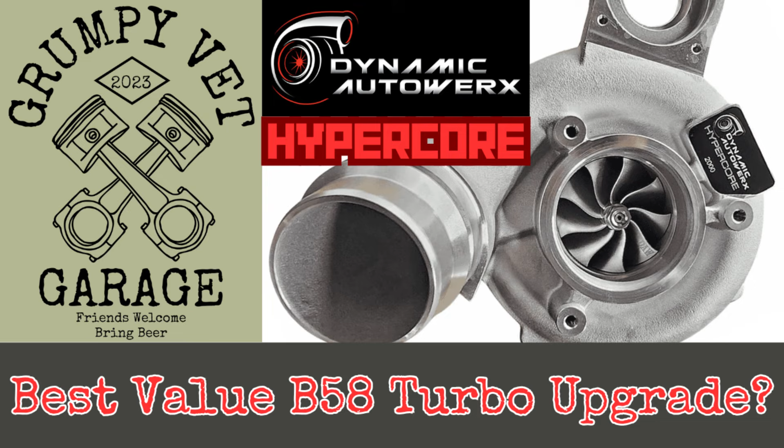On the channel, I've been going over stock location turbo upgrades for the Gen 2 B58. The videos have received a positive response from viewers like yourself, but also generated questions about the Dynamic Autowerx Hypercore and how it performs as a B58 turbo upgrade.

So today, I'm going to go over the Dynamic Autowerx Hypercore. First, we need to look at what the Hypercore is. It is a drop-in turbo upgrade for Gen 1 and Gen 2 B58s.

Dynamic Autowerx characterize it as an ultimate OEM replacement core for those looking to maximize performance without sacrificing drivability. They list this upgrade as a core because it doesn't completely replace your turbocharger.

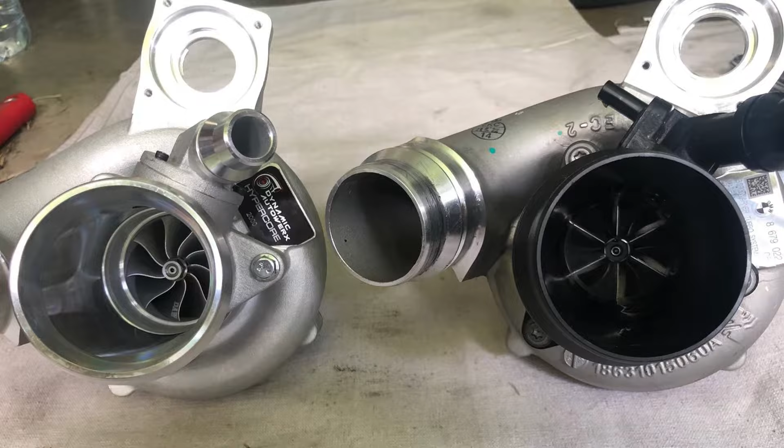It's a new center section and new compressor side of a turbo, but still utilizes the factory exhaust manifold / turbine housing. They promote that the core is easy to install and it utilizes your factory V-band clamp that holds the center section and compressor side of your factory turbo in.

You reuse that clamp, but then you still need to move over oil and coolant lines and of course change seals to complete the installation.

The Hypercore has a forged billet compressor wheel and also uses a Garrett GTX style turbine wheel. Dynamic Autowerx says that the Hypercore is designed, machined, VSR balanced - which is vibration sorting rig balanced - and assembled in the United States. This is great for quality control, but this is also the same process for all other Dynamic Autowerx new construction turbos.

For size comparison, the OEM turbocharger has a compressor inducer of 50 millimeters and is a 6-blade compressor wheel, and then has a turbine exducer of 50 millimeters and is a 10-blade turbine wheel.

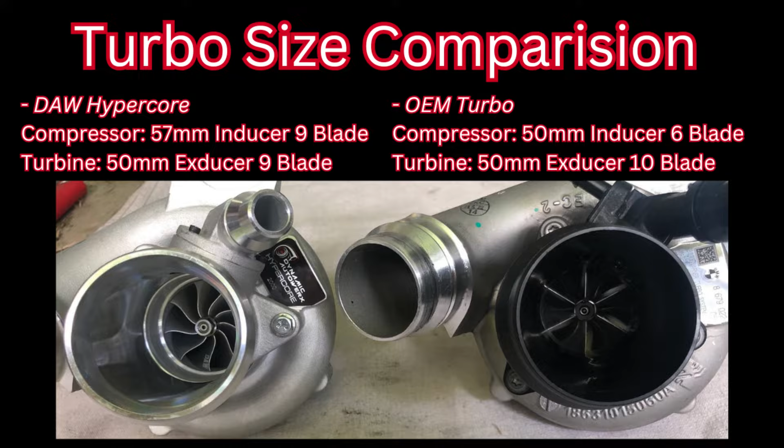The Hypercore from Dynamic Autowerx is 7 millimeters larger in the compressor inducer, so a 7 millimeter larger compressor wheel that is a 9-blade compressor wheel compared to the 6 blades of the OEM.

And then the turbine exducer is 50 millimeters, just like the OEM turbocharger, but it is a 9-blade wheel compared to the factory 10-blade. Dynamic Autowerx markets that this core is capable of offering 12 to 14% more power capability over the stock turbo while maintaining fast spool and excellent throttle response.

Osprey Performance in the United Kingdom is one of the shops that has the most experience with the Hypercore, and they have a lot of high praise for it.

They claim to have made 619 wheel horsepower using the Hypercore. They didn't provide any build sheets of how the configuration of the car was when it made that number, or even what fuel was being used. I'm assuming it's some sort of race fuel or ethanol, but because they really didn't give a lot of information other than the 619 wheel horsepower number, I somewhat take the information with a grain of salt.

Additionally, they talk about using a stock turbo Gen 1 B58 that they had tuned and made 450 wheel horsepower, and then, without changing the tune, swapped in a Hypercore and was able to then make 494 horsepower.

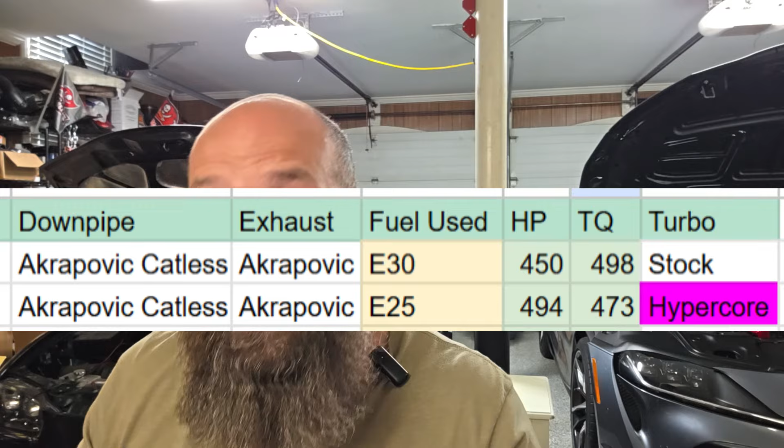So as you can see, the whole setup of the car is the same. The only difference is the Hypercore, with a little bit of difference in the ethanol, but I don't think it's a drastic amount of difference. Before the Hypercore was installed, they were making 450 wheel horsepower, which on stock turbo is pretty good. But after, they made 494 wheel horsepower.

So clear results of a 44 wheel horsepower increase, roughly a 10% increase in horsepower by installing the Hypercore. Seeing the marketing from Dynamic Autowerx and from Osprey Performance, they're claiming like 12 to 15% horsepower increase by installing the Hypercore.

I figure the best way to approach the lack of documented dyno data is to look at what stock turbo performance would be, and then we can try to estimate what benefit you would get from installing a Hypercore upgrade. So here is all the data I was able to find.

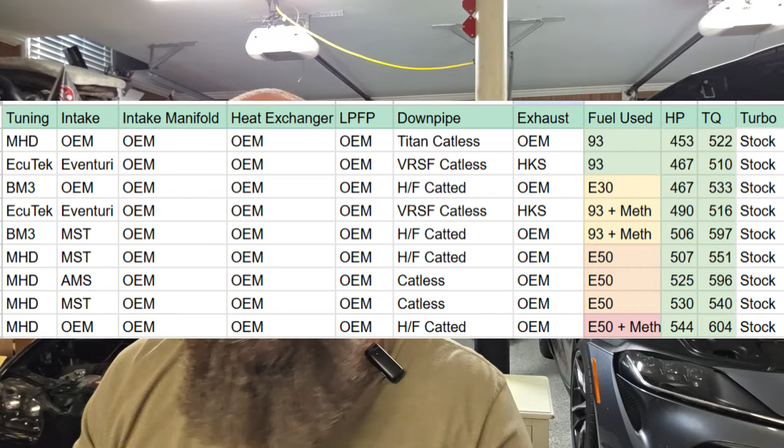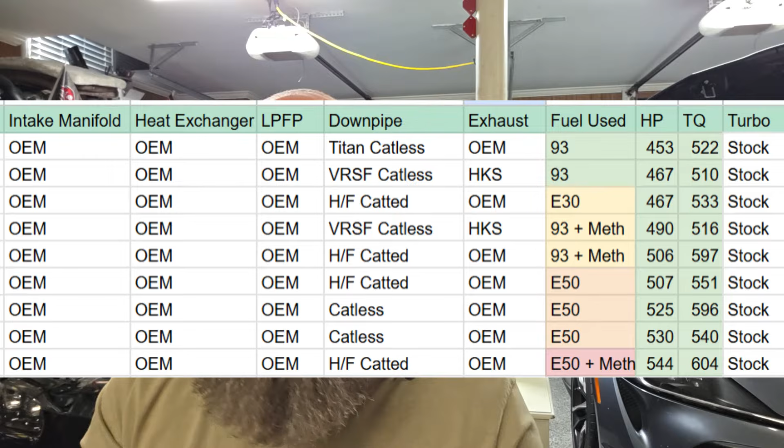Stock turbo Gen 2 B58s, some using 93 octane pump gas, some using 93 with meth, also some E-blends, some conservative ones around E30, and then slightly more aggressive E50, and then E50 with meth injection.

Looking at the data, we can see stock turbo performance, 93 octane on the bottom end, making 453 horsepower, which for a stock turbo is still really good. And then E50 with meth injection making 544 horsepower, which again on a stock turbo is pretty impressive numbers.

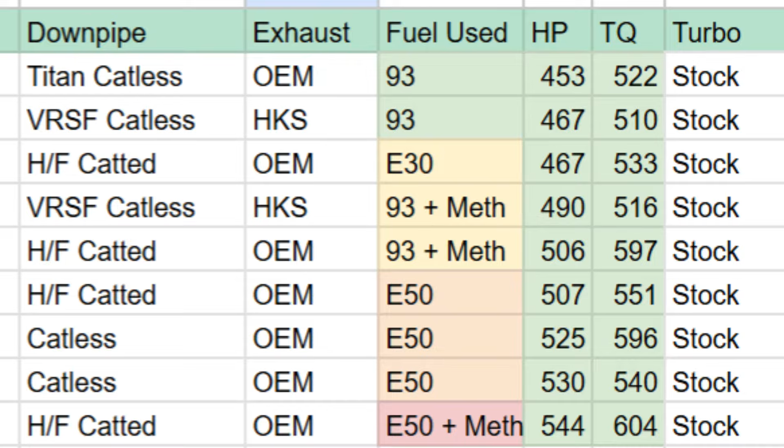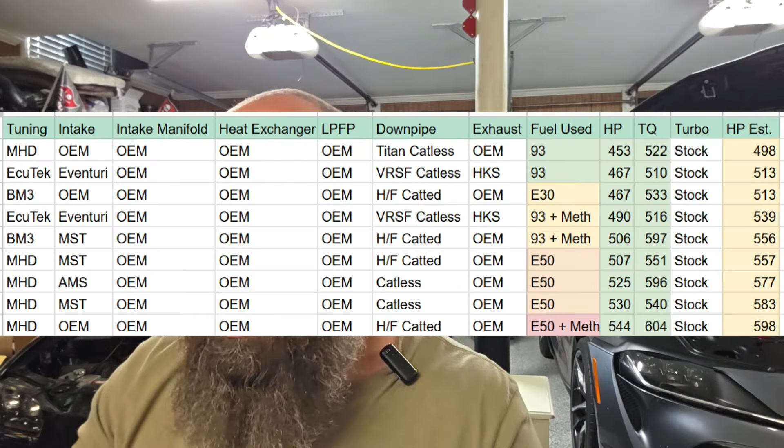So trying to keep the power estimates a little more realistic, I've decided to go with a 10% increase. I still think that could be a little optimistic, but with a 10% increase in power, that 93 octane, 453 horsepower output would then turn into 498 horsepower.

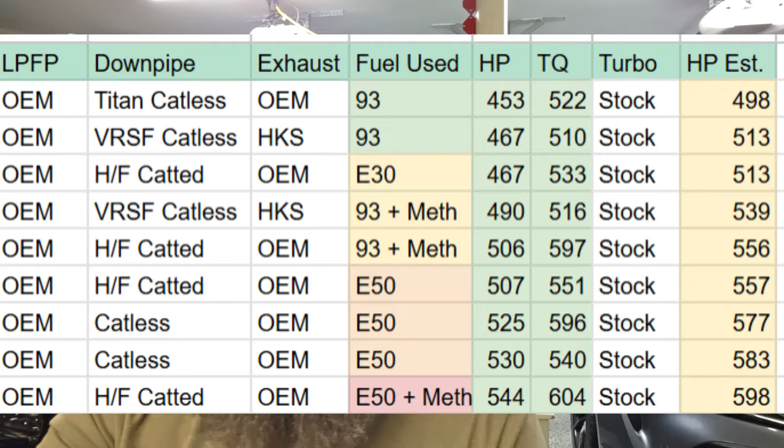And then the E50 with meth injection that was 544 horsepower, with a 10% power increase, we're talking 598 horsepower, which is pretty impressive. Additionally, to put this in perspective, the Hypercore being able to make on E50, let's say 550 to 598 horsepower, is roughly equivalent to the performance you could expect by installing a Pure 800 and running 93 octane pump gas.

So ultimately, my opinion of the Hypercore is positive. I think it's for people that are wanting to maintain stock transmission, stock fuel system, and then on 93 octane, probably trying to make somewhere between 480 to 500 horsepower, and then on E30, trying to make somewhere around 520 to 540 wheel horsepower. And I think that really wouldn't even be pushing the setup.

I think with more aggressive tuning, a more aggressive setup, more supporting mods, it's possible that the Hypercore could support over 600 horsepower, but I think that would be the limit. So the 619 wheel horsepower talked about by Osprey Performance, I think is possible, but right there at that knife edge limit of what the Hypercore is capable of doing.

Another thing I think the Hypercore would be good for is a simple OEM turbo replacement. If your OEM turbo on your Gen 1 or Gen 2 B58 is going bad, the cost of turbos, even factory turbos, aren't free. They're not inexpensive. And I think the Hypercore is actually a very good option for just replacing a soon to be failing factory turbo. So it's a positive whether or not you're trying to make a little bit of performance, but you've got to be realistic of how much performance you're really going to be capable of, or also simply using it as an OEM replacement upgrade, like an OEM plus upgrade.